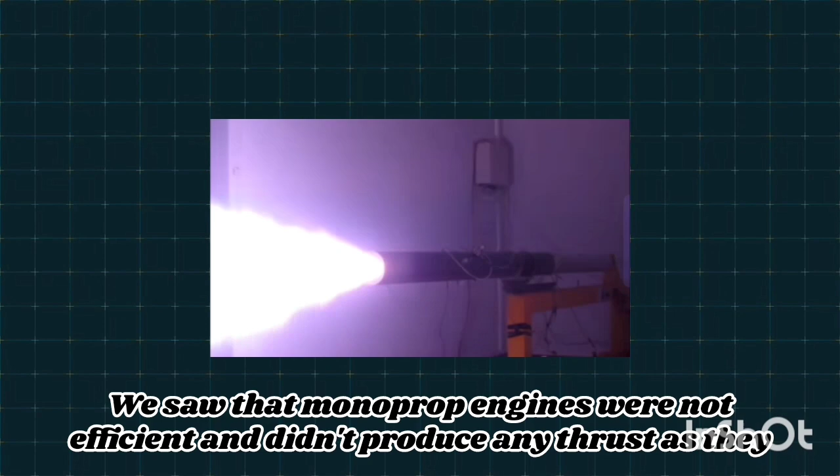So, in the last video, we talked about cold gas thrusters and monoprop engines. We saw that monoprop engines were not efficient and didn't produce any thrust, as they were not using the chemical properties of the fuel. So, we want to pump the propellant into the engine.

Obviously, a pump increases the pressure a lot, and as we know, pressure is a good thing. But running a pump requires energy, a lot of energy. So perhaps the easiest way to power a rocket pump is with electricity.

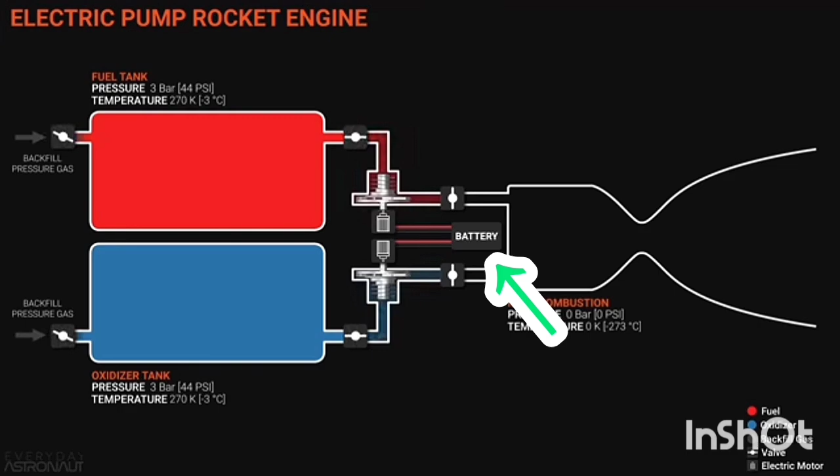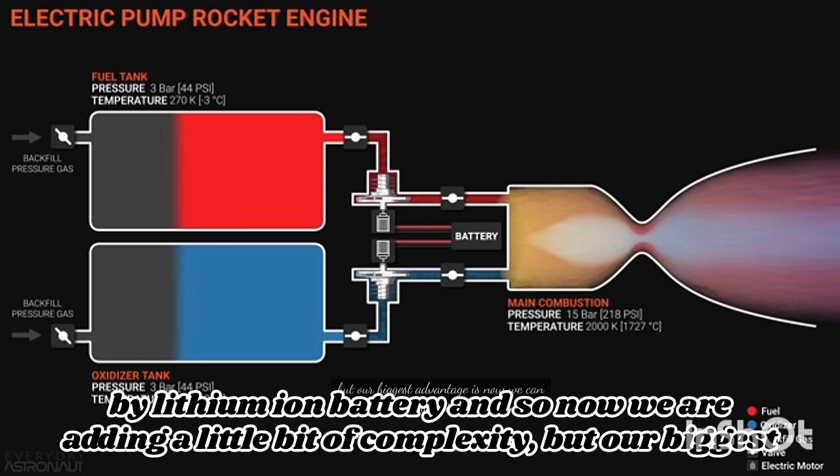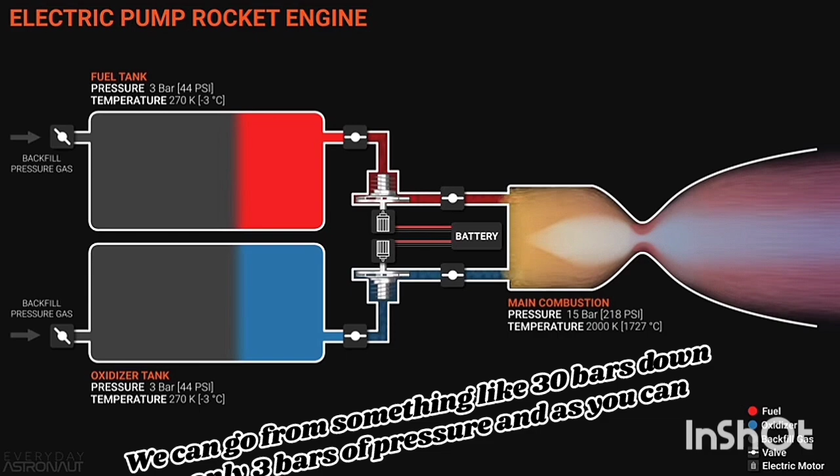That is now a reality in spaceflight. You can run a rocket engine with pressure from a pump run by an electric motor, powered by a lithium ion battery. And so now we are adding a little bit of complexity, but our biggest advantage is now the pressure inside the tanks. We can go from something like 30 bars down to only 3 bars of pressure.

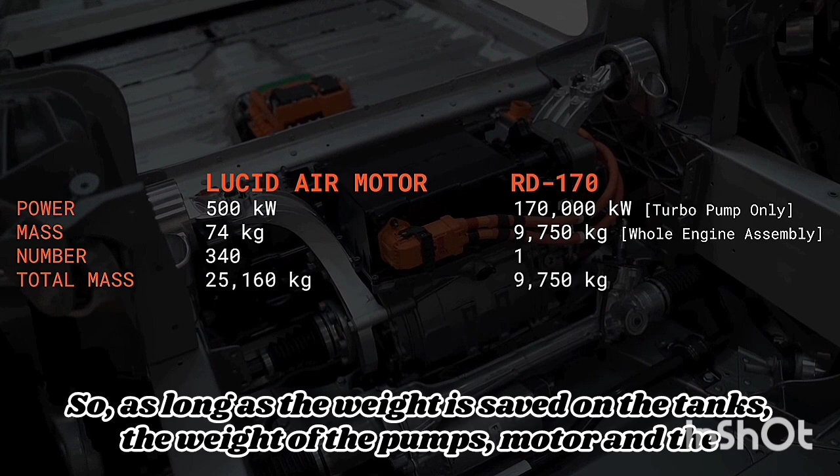And as you can imagine, that makes the tanks much lighter. So as long as the weight is saved on the tanks, the weight of the pumps, motor and the batteries can be compromised.

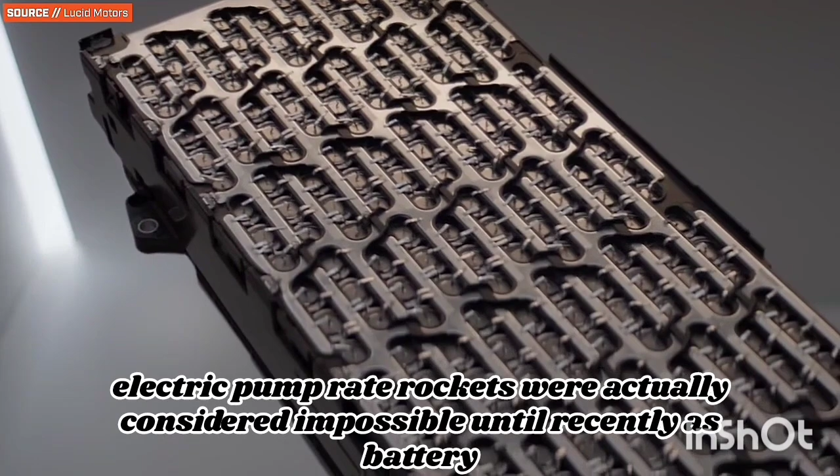Batteries are less power dense than a turbine and propellant. Because of these limitations, electric pump-fed rockets were actually considered impossible until recently, as battery technology has finally become good enough to even make this a viable solution for an orbital launcher.

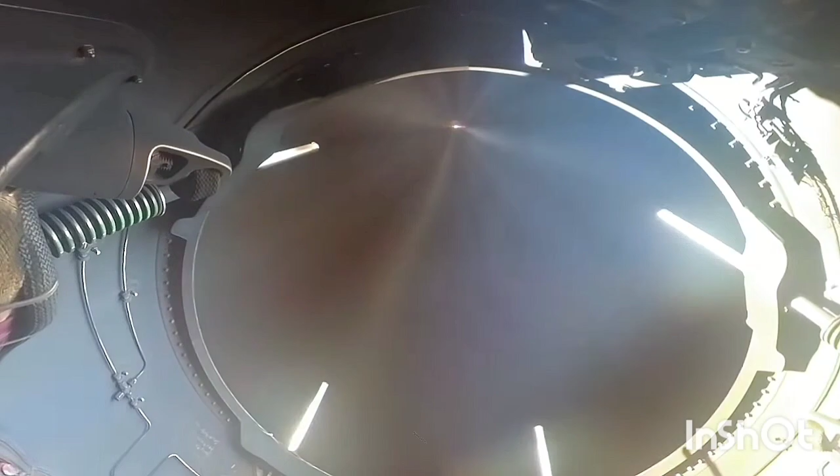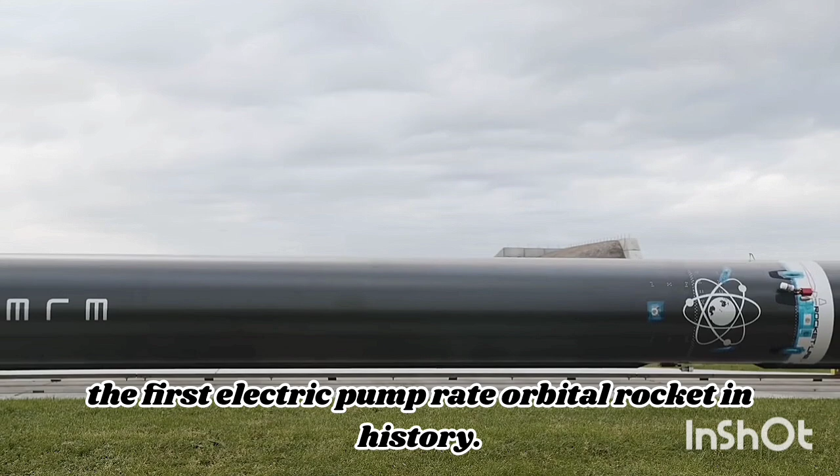But just barely, Rocket Lab has pushed through that barrier and was successful in making the first electric pump-fed orbital rocket in history, the Electron. Since they have paved the way, Astra has followed in their footsteps with the Delphin engine on the first stage of their rocket, as well as

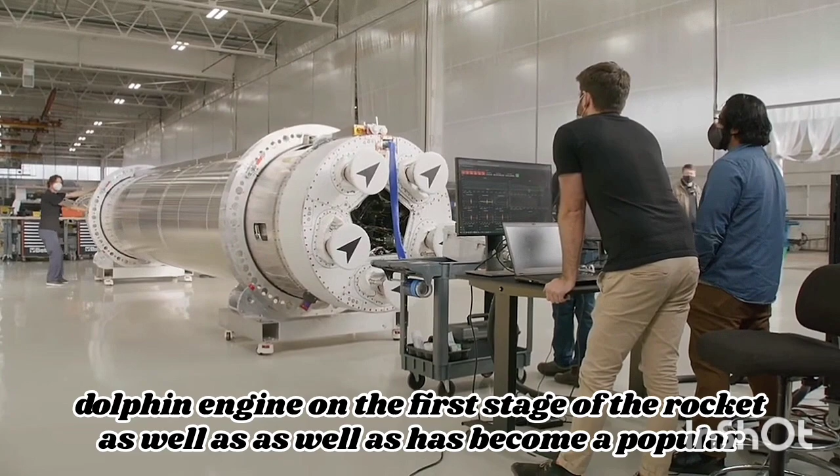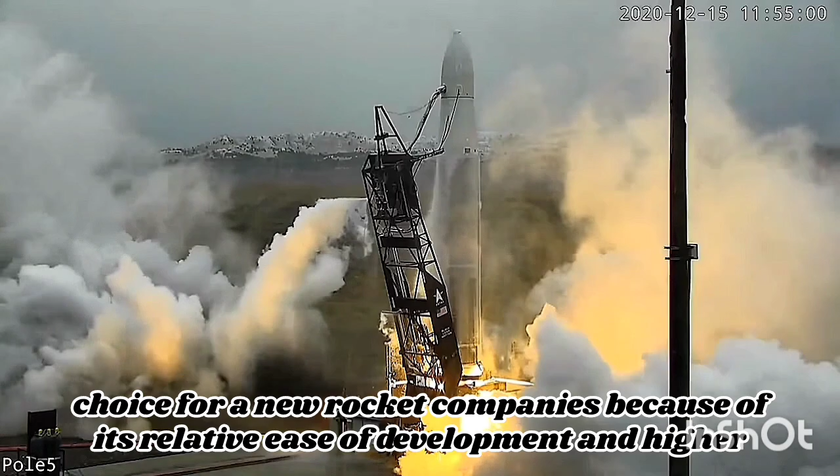it had become a popular choice for new rocket companies because of its relative ease of development and higher performance than a pressure-fed system.

And due to the less scalability of the batteries, it is not a viable solution for larger rockets. So, what if you need more performance?

Well, I think it's time we dive down into the energy of fuel to spin the pumps and run our rocket engine.

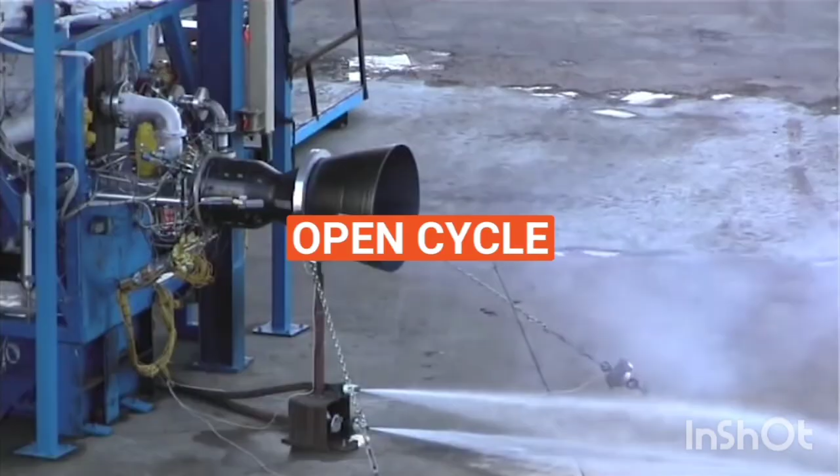So, as we have mentioned, it can take a lot of energy to spin a big pump fast enough to flow ridiculous amounts of propellant into the combustion chamber at very high pressures. Although 230,000 horsepower is at the upper end of the power requirements, tens of thousands of horsepower are still in the realm of most orbital rocket engines.

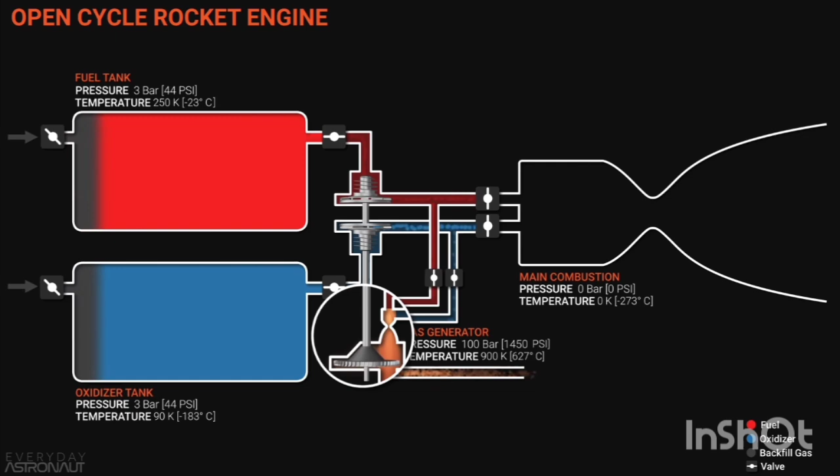So if instead of having an electric motor spin the pumps, let's just basically take a small rocket engine and point it at the turbine and allow that high velocity, high pressure hot exhaust gas to perform mechanical work. That's the idea behind the open cycle, otherwise known as the gas generator cycle rocket engine.

You basically create a small rocket engine whose sole purpose is to generate high pressure hot gas that can be used to spin the pumps that feed the engine.

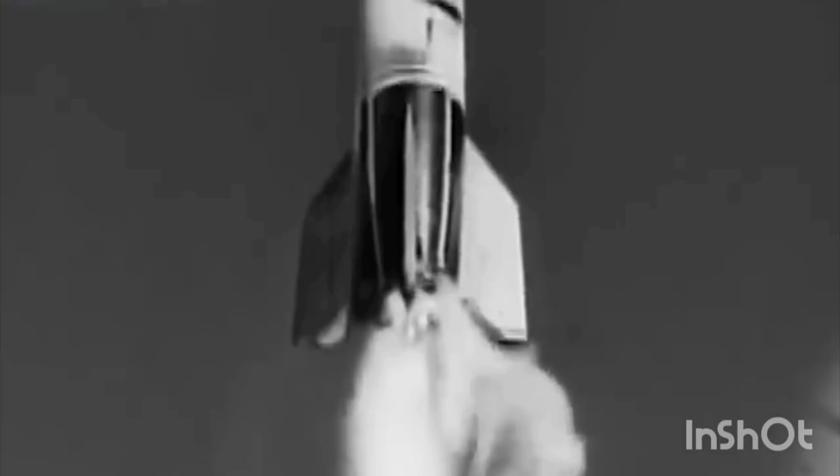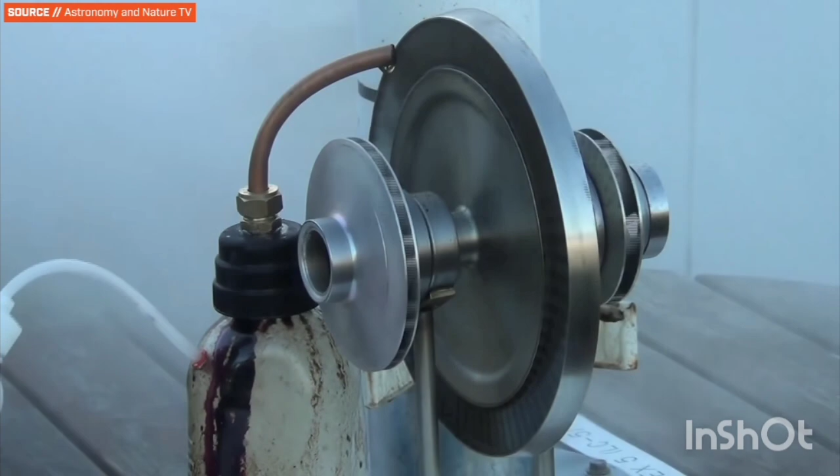One of the earliest examples of this was the German designed V2 rocket, also known as the A4. Instead of using the main propellant, it chose high concentration hydrogen peroxide as fuel and then ran it over a potassium permanganate catalyst that can create enough energy to spin the turbine up to the right speeds.

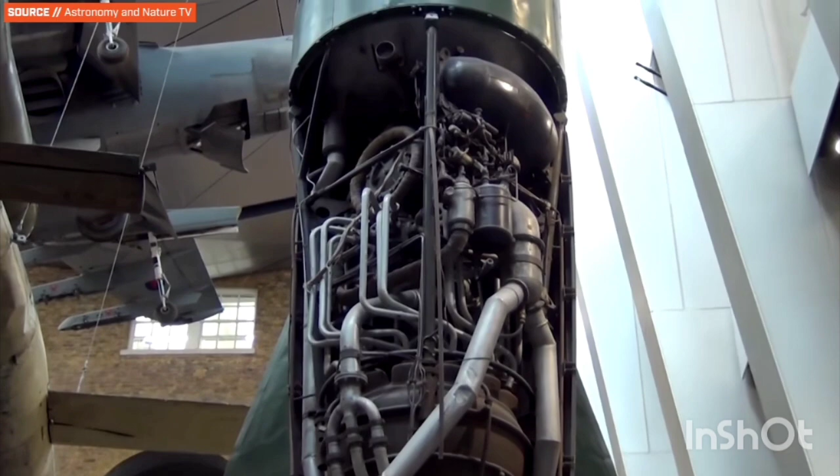So the pressure inside the gas generator can be really high, whatever it takes to get the turbine up to the right speed to power the pumps.

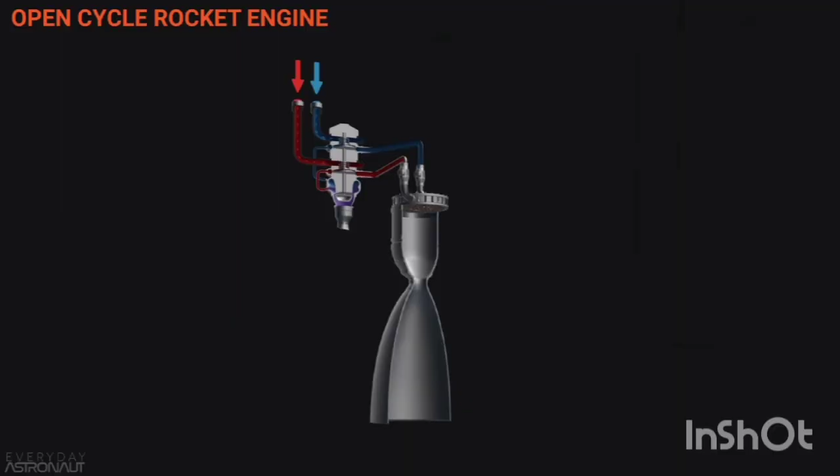But of course, this brings up a conundrum. If the pumps are powered from the gas generator, and the gas generator is powered by the pumps, the pumps need the gas generator to run itself, and the gas generator needs the pumps to run itself.

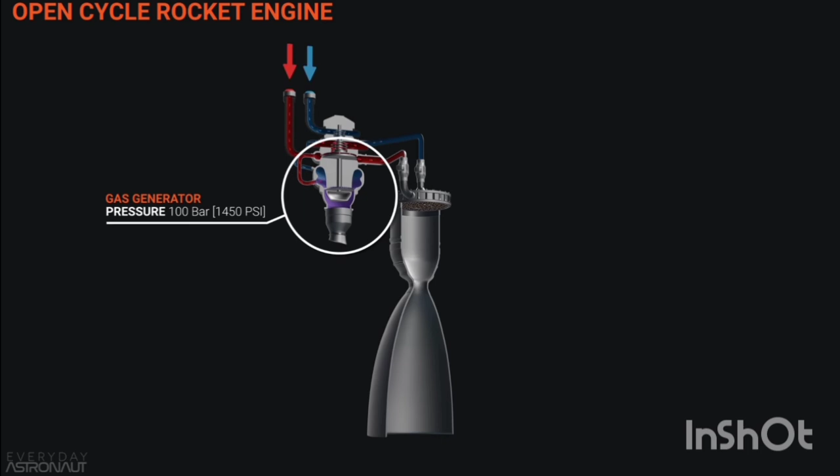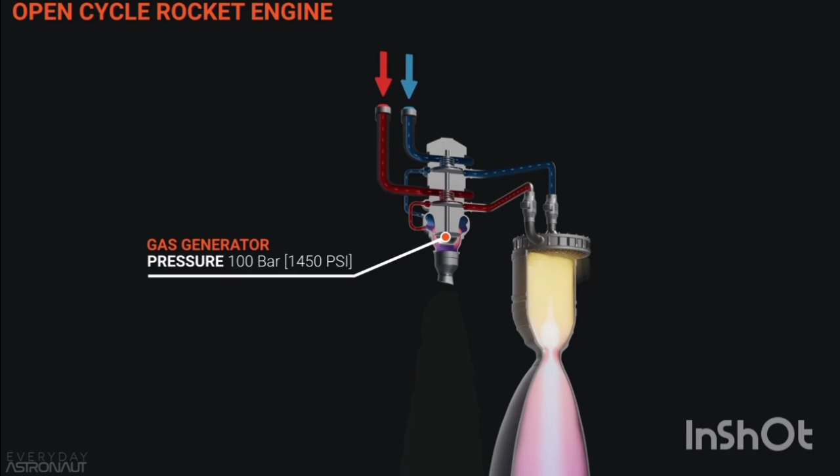You get the point. Well, starting a rocket engine is a whole different topic altogether, so we will save that for another video. But the most common thing to do is just basically shoot a separate cold gas thruster at the turbine to get it spinning before the engine actually starts to run. This is called the helium spin start.

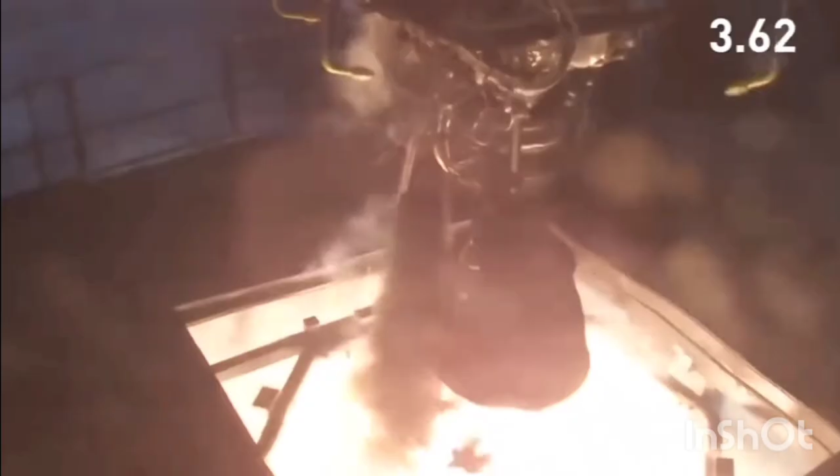With the gas generator, all the exhaust gases that were used to spin the turbine are simply dumped overboard, or perhaps used to cool some portions of the nozzle, but the gases are not added into the main combustion chamber. That's why this is called open cycle.

The exhaust gas is used and then it is expelled to the open air or space. It is not used in any part of the main combustion process.

The downside with the open cycle is that there is a ton of unburnt fuel in the exhaust. See how sooty the exhaust gases from the gas generator can be. That's just unburnt fuel being wasted and thrown away.

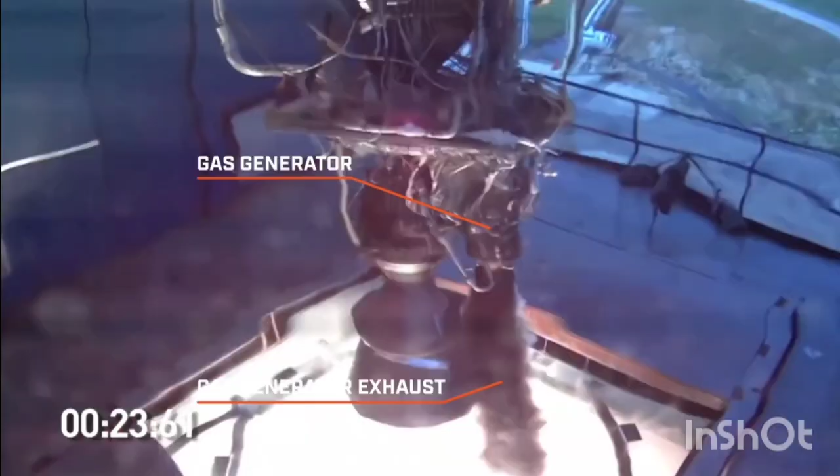So the open cycle always wastes some of the propellant in order to power the pumps, but generally it's considered worth it because it is a relatively small amount of fuel compared to the amount of fuel used inside the combustion chamber.

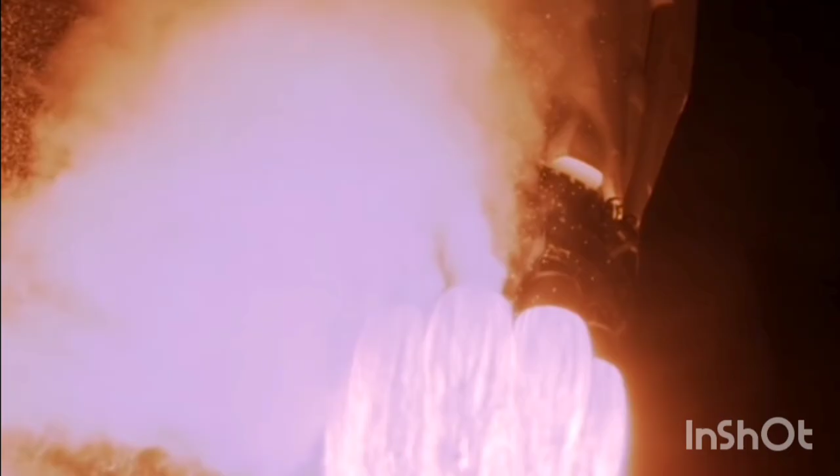Some good examples of gas generator open cycle engines are the Merlin 1D engines on SpaceX's Falcon 9, the F1 engine on the Saturn V, the RS-27A and the RS-68A, the Soyuz engines, and the RS-68 engines on the Delta IV Heavy, and many others. It is easily one of the most common cycle types of orbital rockets, being extremely effective, highly capable, and relatively easy to develop compared to the other counterparts.

It is the most common choice of many rocket companies. But what if you are still not hitting your target performance, and you are crying at the thought of wasting fuel and dumping it overboard?

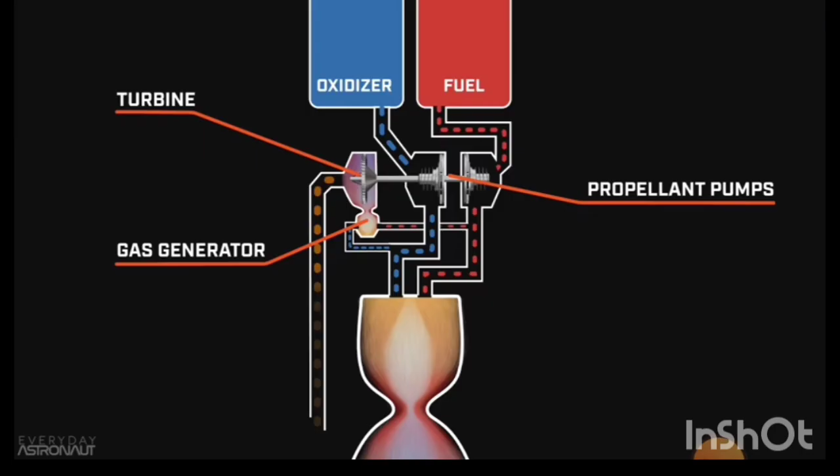Well, what if we could pump that exhaust gas right into the engine and not waste any fuel?